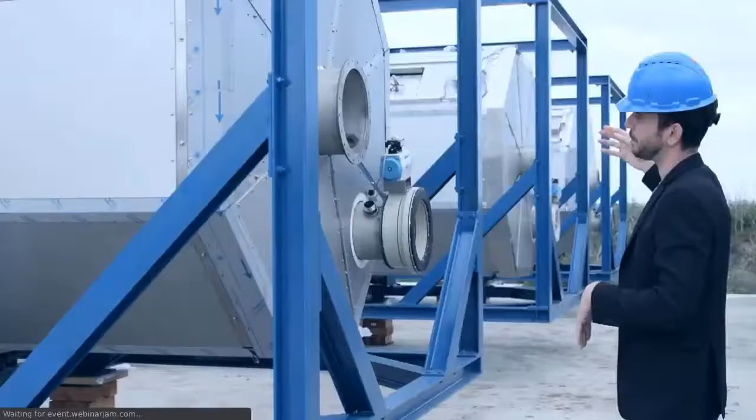In the world, there was a big problem of organic waste. The unique way that Bio4Sec has been facing this problem is to design systems that can be installed directly at the source. First of all, we remove 90% of transportation of millions of tons of waste every year.

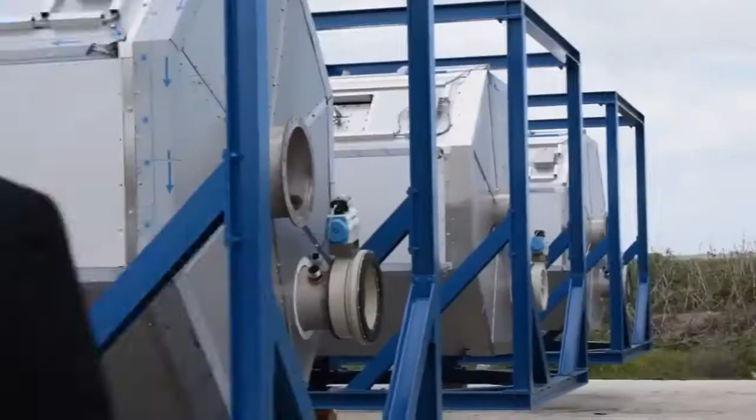We reduce greenhouse gas emissions. We actually subtract CO2 from the atmosphere. And third, we are producing a product, something that can be reused into the economy, the society, and put safely back in nature. We looked at this problem and we thought, we need to design something that's easy to install and easy to put anywhere in the world.

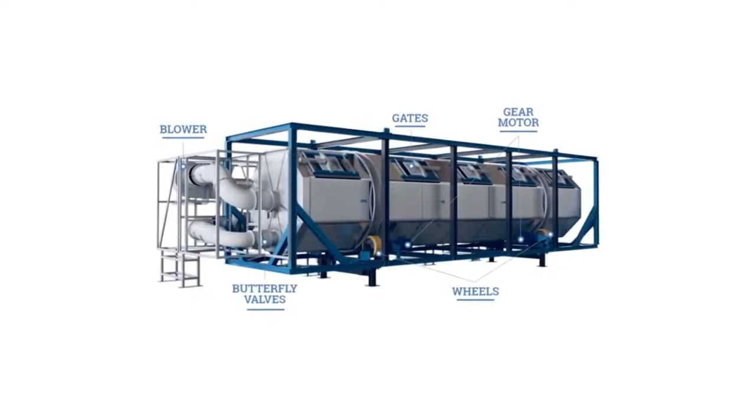So we designed 2 modular machines. The first machine has the goal to remove water. In order to remove water, there is a lot of energy required. And the second machine transforms all that dry waste into energy. All the energy is extracted in an extremely clean way, and then we are able to also recuperate all the elements that otherwise would be wasted.

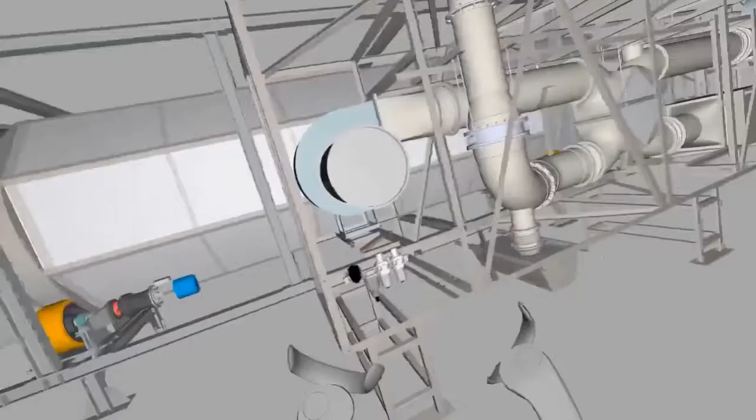Designing new machines and a modular system, working with manufacturers, is always a bit of a challenge, showing them the products, making sure that what we design is buildable and easy to mount. It's important to be able to show easily, either to the engineers or even to the outside world, how this machine can be operated. Is it safe? Is it going to fit into my plant?

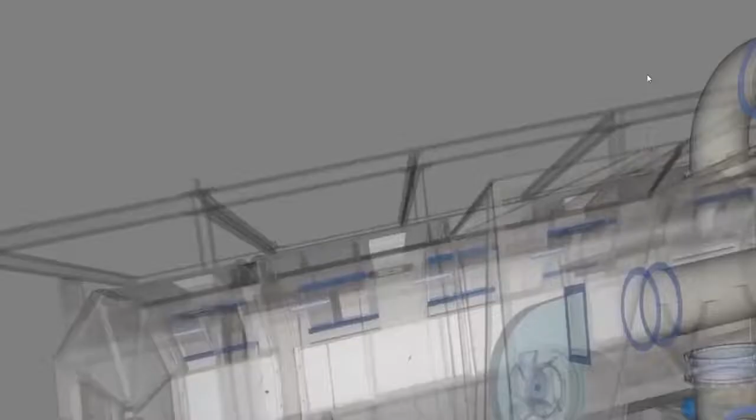So transitioning to virtual reality gave us the opportunity to augment collaboration between the engineers, also showing some people who are not necessarily technical, in a more user-friendly way, how the machine is safe and how it looks like in real life, and other aspects that convince our clients and collaborators to move forward with the project.

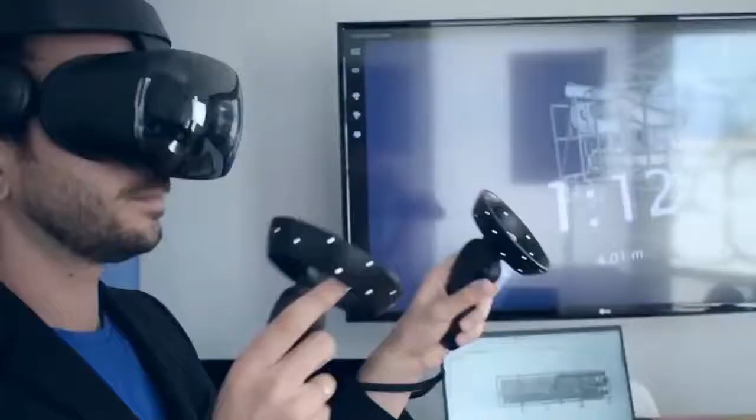Mindesk gave us a different perspective. Instead of seeing everything on the screen, we can now navigate in virtual reality into the product, understanding it, seeing it with different eyes, and understanding if mechanics can work on it easily, if operators are going to be able to walk around it and use it in a different way. Some perspectives were impossible before, even with the most sophisticated 3D programs.

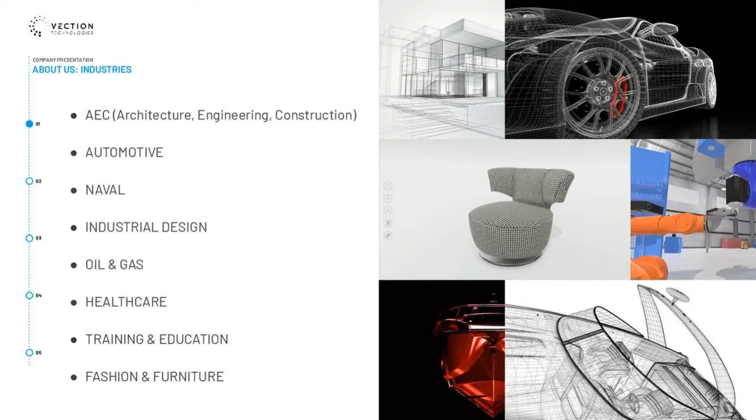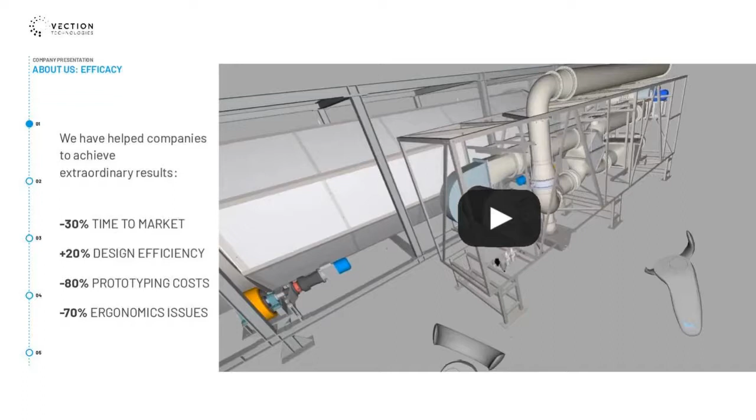And this is the same video you just saw, and you will find this linked in the presentation. You can download it after this. There are some real tangible examples of the boosts in productivity that we were able to deliver to these large companies.

So today I'm going to talk about the main products that we have, which are FrameS, Mindesk, and also custom services. We're going to start from Mindesk, which is where I come from.

Mindesk, long story short, is a plugin for CAD software. CAD stands for Computer Aided Design. Specifically, we're talking about Rhino and Unreal, or also Dassault Systèmes SolidWorks, which is very common, especially in the oil and gas and machinery industries.

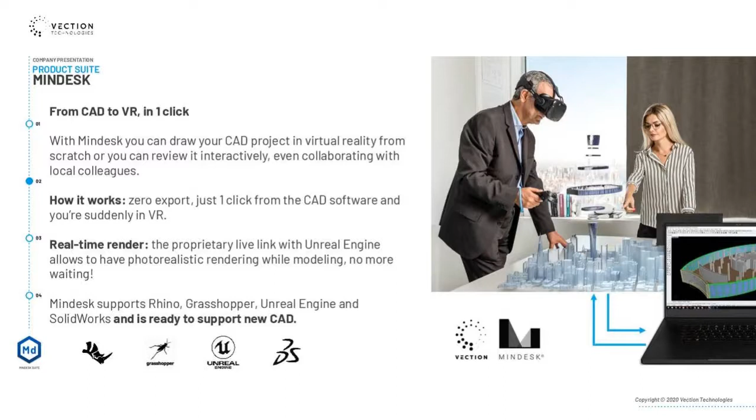What this does is a live link between the CAD and virtual reality that allows to visualize the model, but also to manipulate it and edit the object from virtual reality itself. Very useful for design review and to collaborate more effectively with your colleagues.

And since everything is based on the CAD itself, all the calculations, all the math is made by the CAD itself, there is no interruption of the workflow. As a matter of fact, there is an improvement of it.

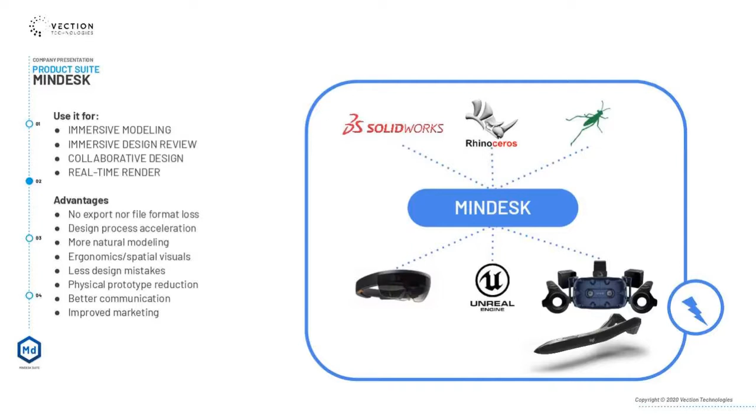By doing this reverse engineering in virtual reality itself, you could literally do it with your hands. Starting from a point cloud scan, which is from reality, one can cut the reverse engineering times to a couple of weeks rather than a couple of months. There is an order of magnitude of improvement in the productivity of this specific phase.

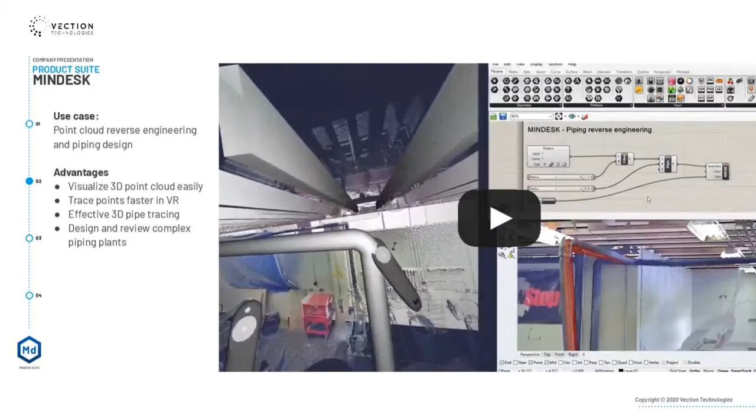Then there is also FrameS. FrameS is a slightly different solution, always in virtual reality, that instead of being based on the CAD software itself, it works with FBX or OBJ files, which are exports from many types of CAD software.

This software can be used collaboratively, even remotely, up to 6 users connected at the same time, and is used more to customize the product or to show it to a remote audience.

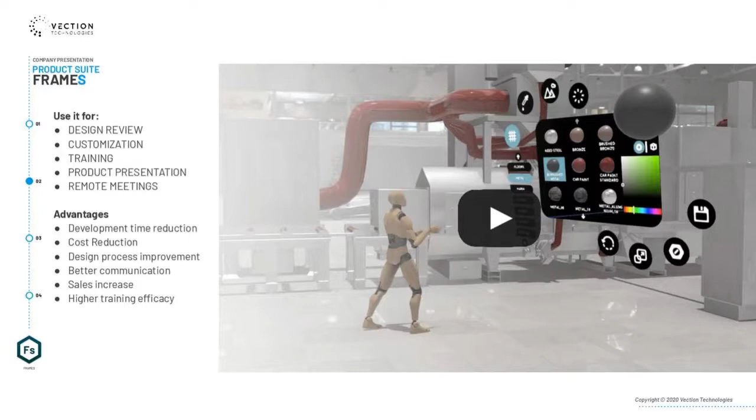In this other video that you're going to find in the presentation link, there is an example with some heavy machinery. Besides modifying the colors, of course, you can explode the project. You can analyze and visualize the single components, and you can show that to a remote audience.

Besides that, we also offer some custom services in virtual reality or augmented reality. Anything that you could possibly think of is something that can be made in virtual and augmented reality.

This specific example, linked again in the presentation, was for Bonatti, which is an oil and gas machinery company. We were able to craft an on-field training experience that reduced the number of accidents that happen after employees were trained with this solution, because they developed muscular memory, and the training was a lot more effective. This was just an example, but literally anything you can think of is something that we can make as a custom project.

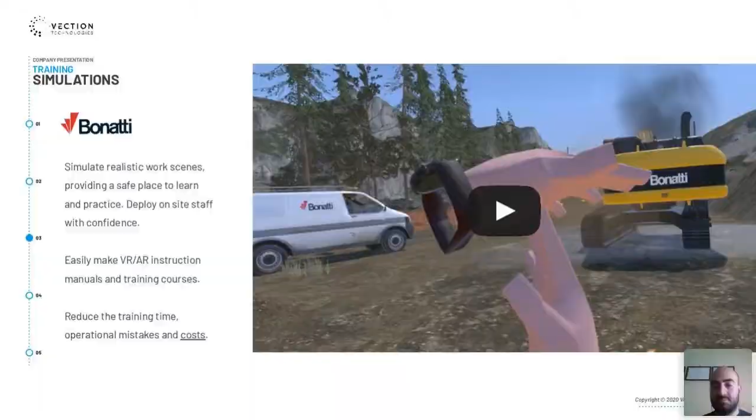Come on, don't be shy, guys. In the meantime, I may have a question myself.

So what was the most kind of unexpected application where Mindesk has been of help?

Wow, that's a nice one and an unexpected question. So...

One of the surprising things was that a designer had to design a theater, using this CAD plugin for visualizing sound waves. But because in Mindesk you have the capability of editing things in virtual reality, he was moving the walls of the theater with his hands and seeing in real time what are the effects on the sound waves. That was pretty unexpected.

We didn't plan for it, but another example: in downtown Canberra, Australia, there is a statue that was made by a sculptor who created it entirely from scratch using virtual reality. We have a monument made in Mindesk.

I have a few more examples, but let's save some time for other questions. If you want, I could tell you about the oil and gas industry, since this is our audience today. In a petrochemical plant, there was a reverse engineering case where a fire damaged part of the facility and it had to be reconstructed. To do that, you have to assess the damage and make a CAD representation of it, because the pipes and other objects have to be manufactured.